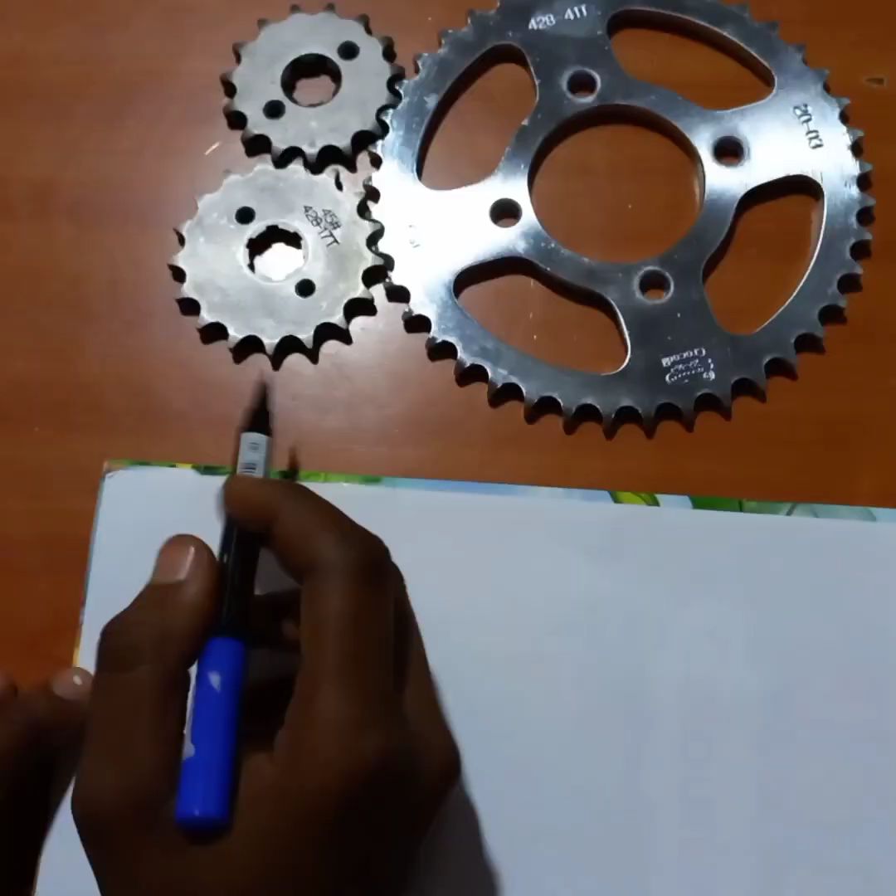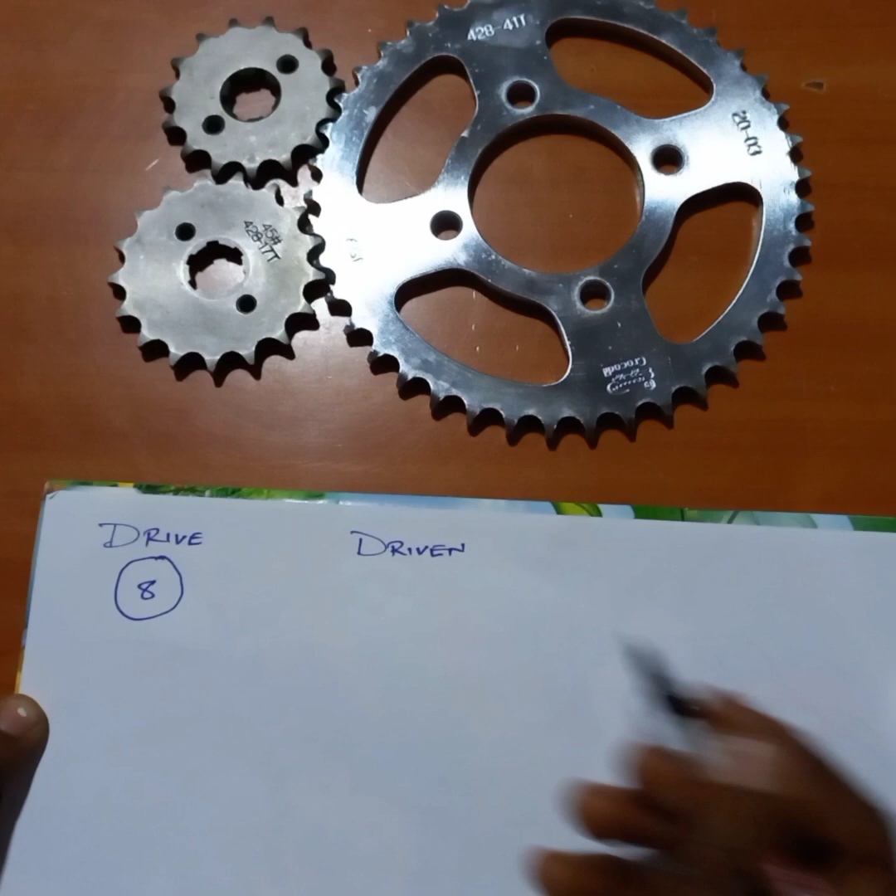In every motorcycle, you have a drive sprocket and a driven sprocket. For example, if you have a drive sprocket with 8 teeth and a driven sprocket with 16 teeth, to get the ratio: drive sprocket divided by driven sprocket. In this case, 8 divided by 16 equals 0.5.

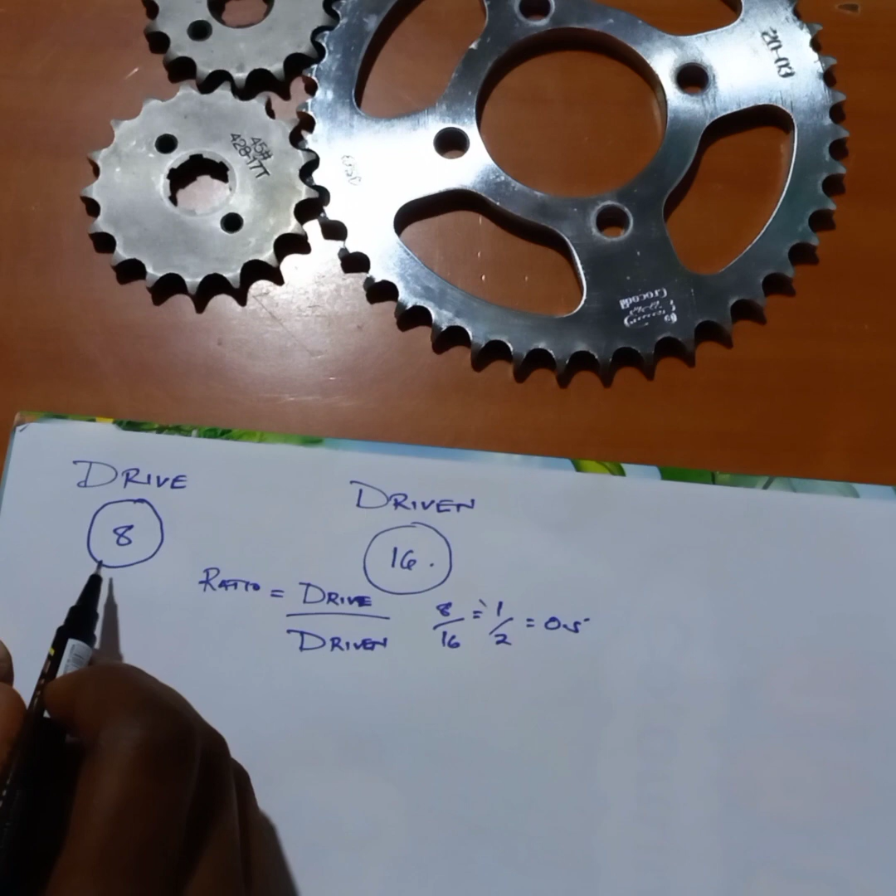This means that the driven sprocket is half as fast as the drive sprocket, and it also means that the drive sprocket will rotate twice to make this driven sprocket rotate once.

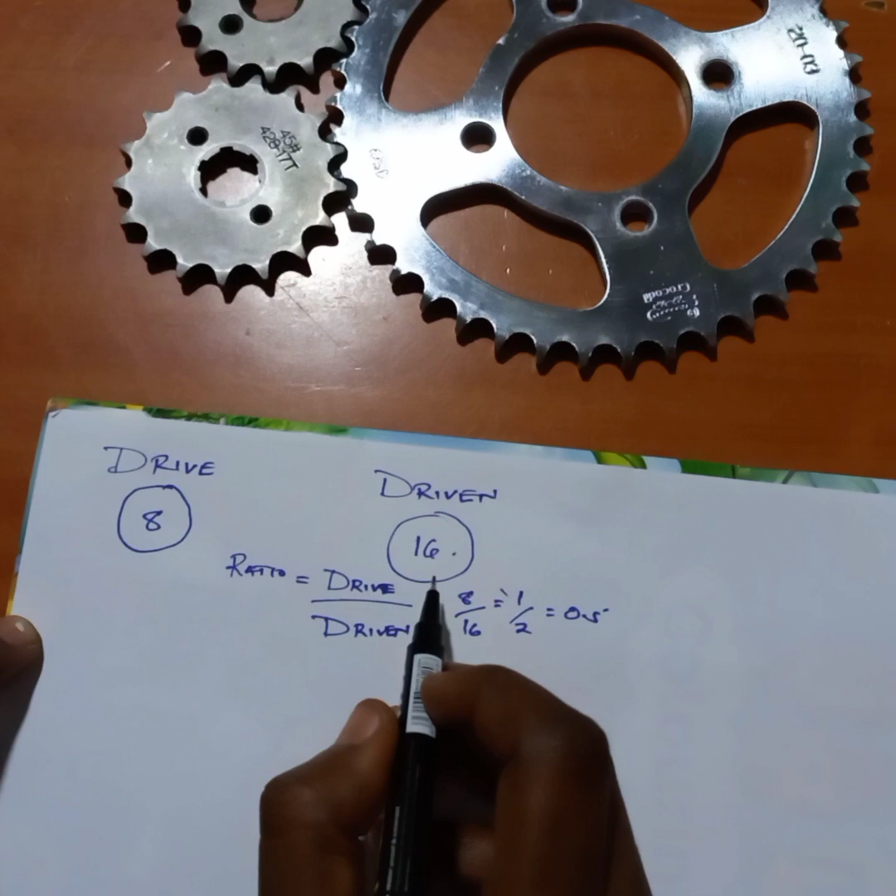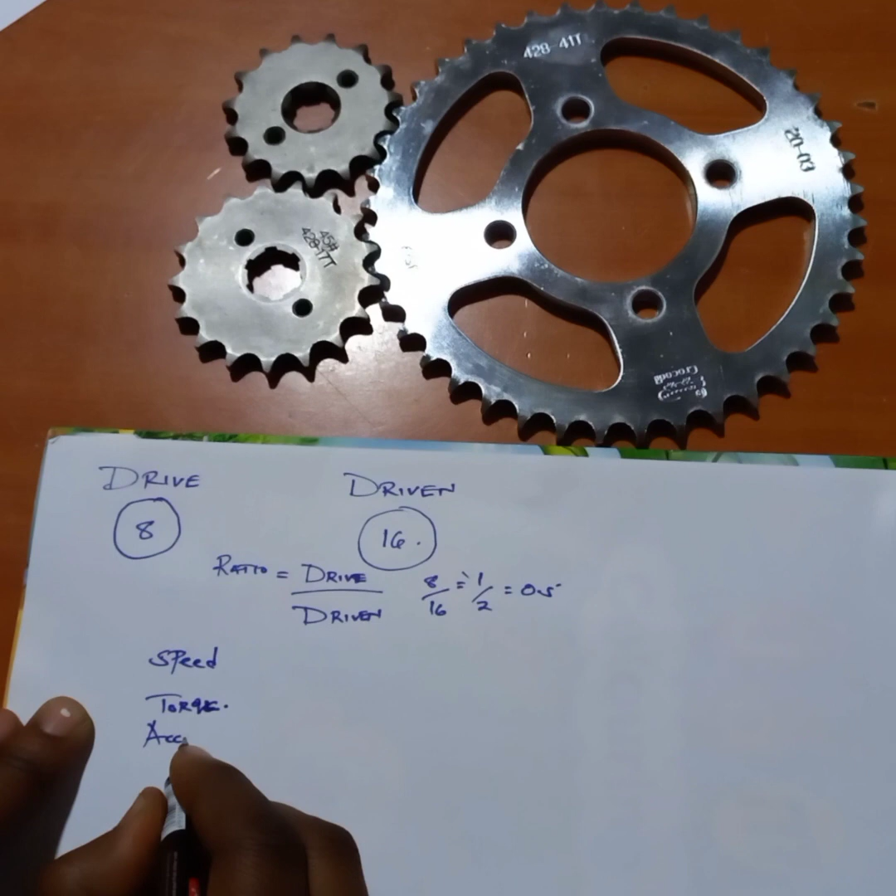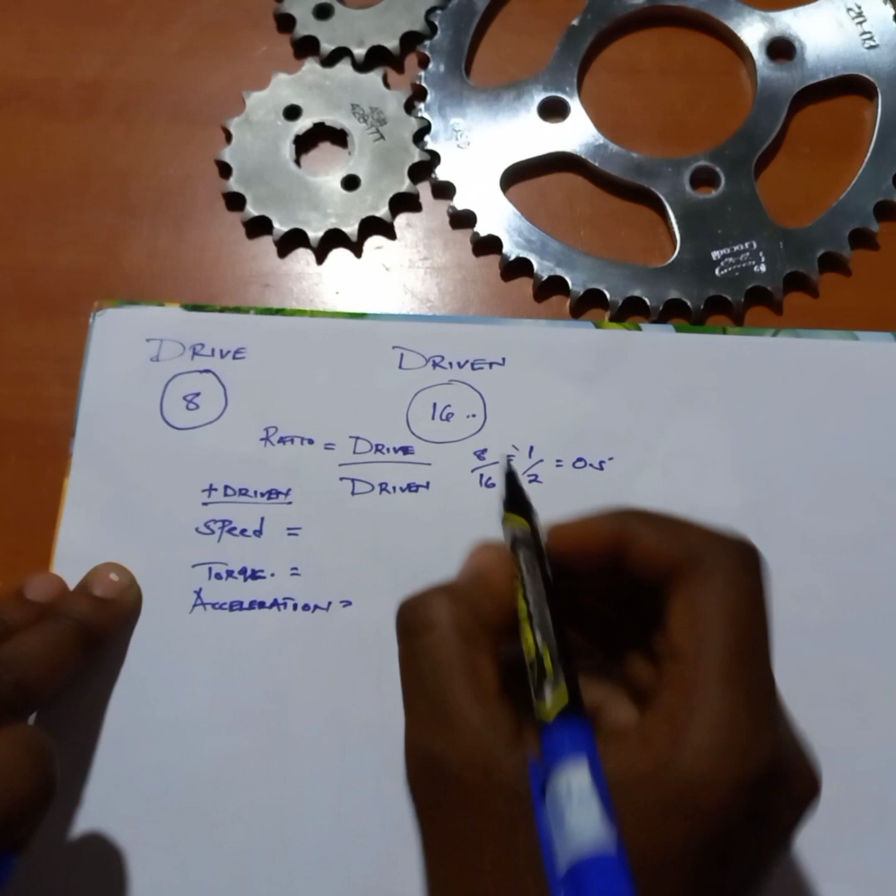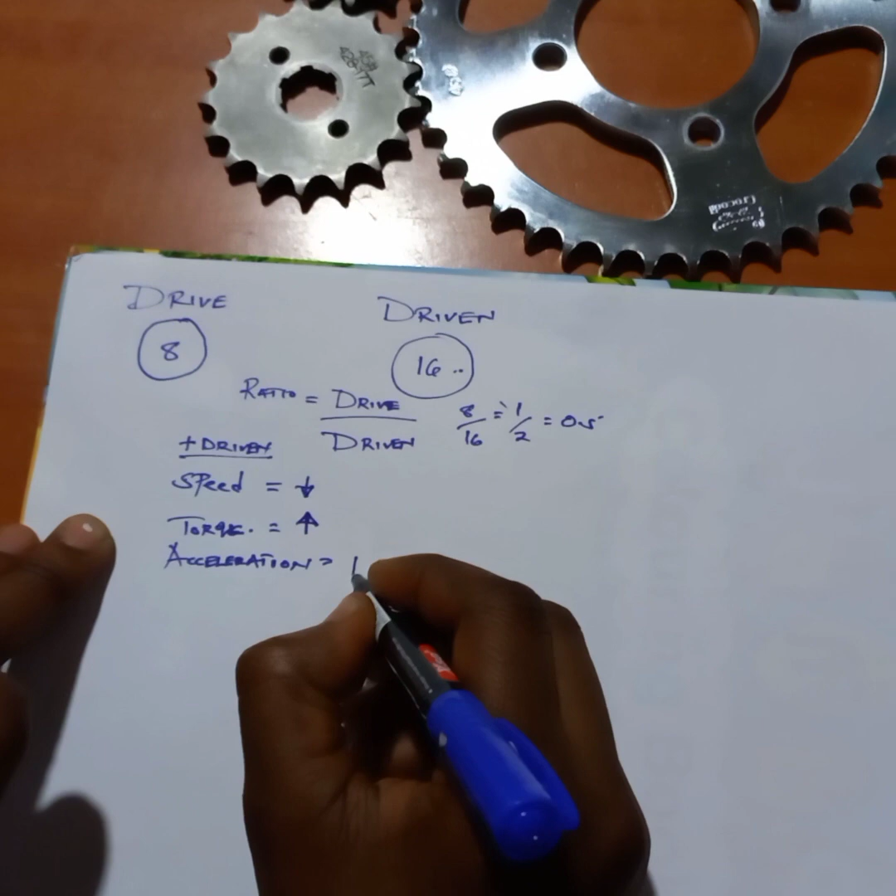So when you alter the number of teeth on either of these, the speed, torque, and acceleration changes. Every time you add teeth on the driven sprocket, the speed will reduce, the torque will increase, and the acceleration will increase.

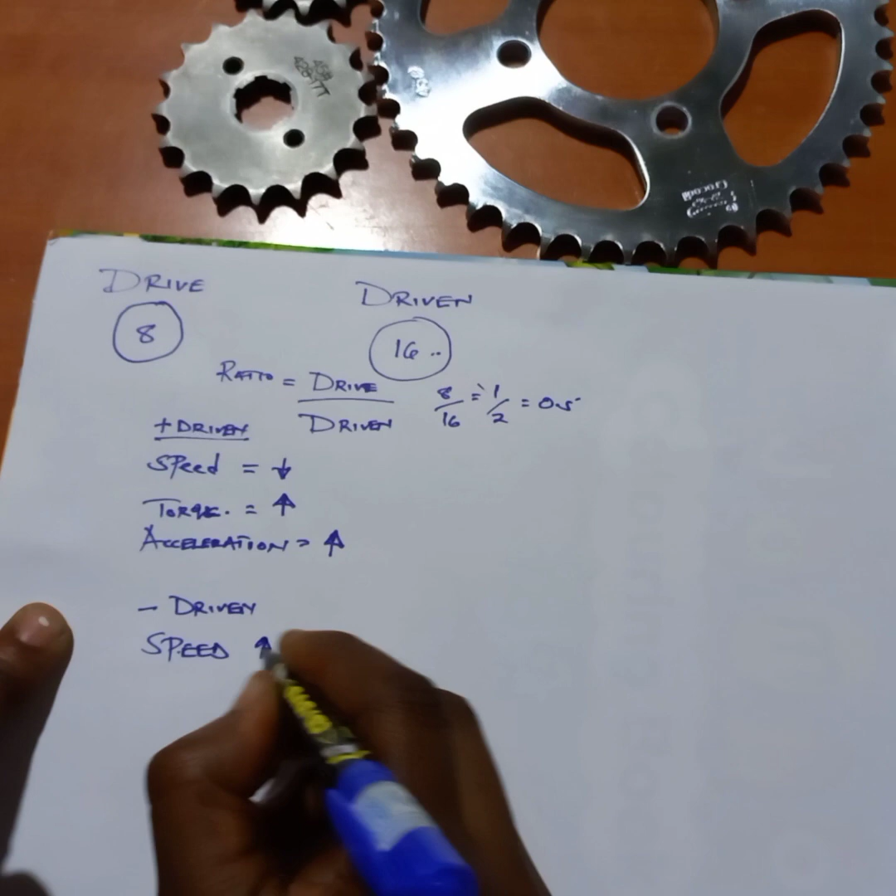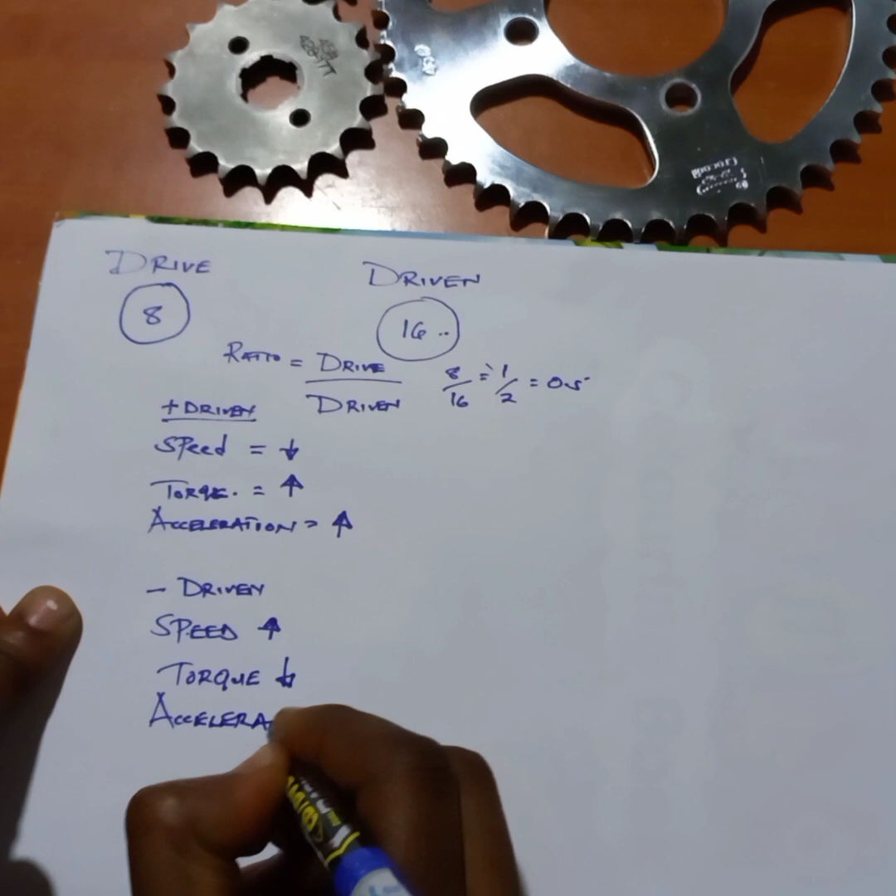When you reduce the teeth on the driven sprocket, speed increases, torque decreases, and acceleration decreases. Now you must be aware of the consequences.

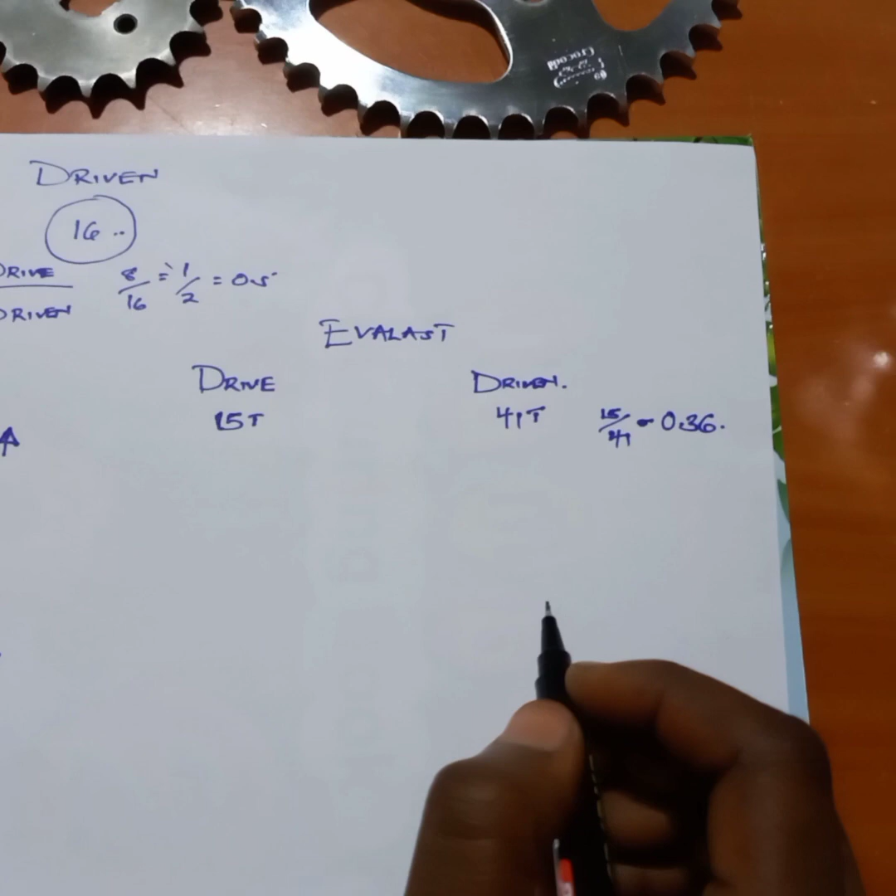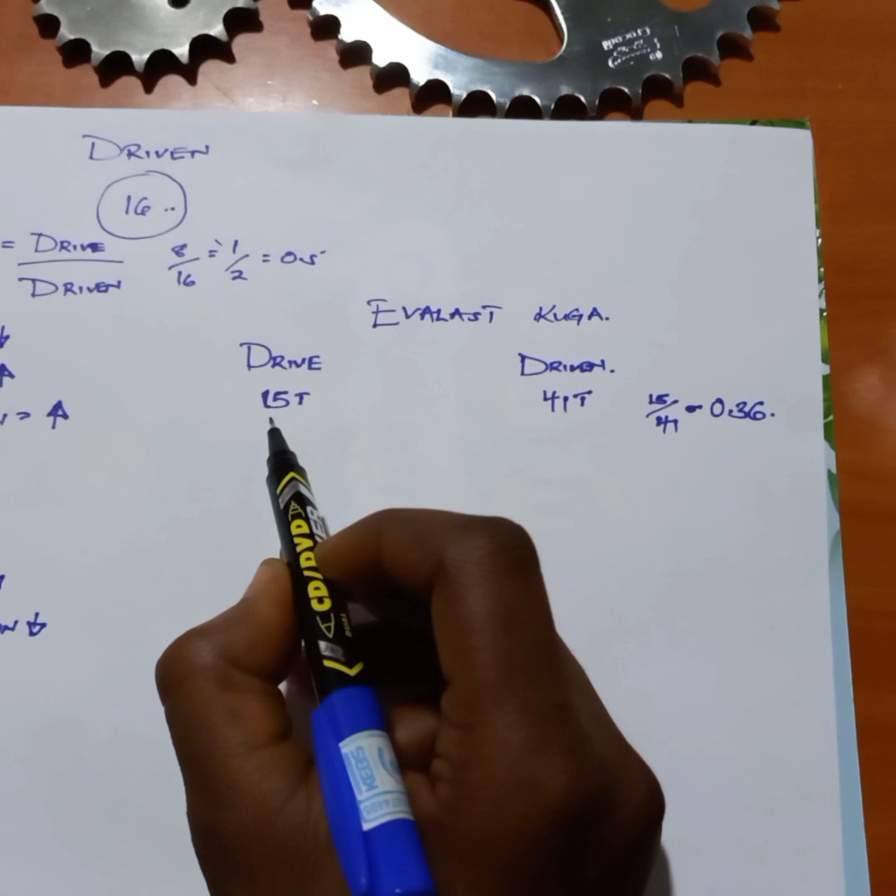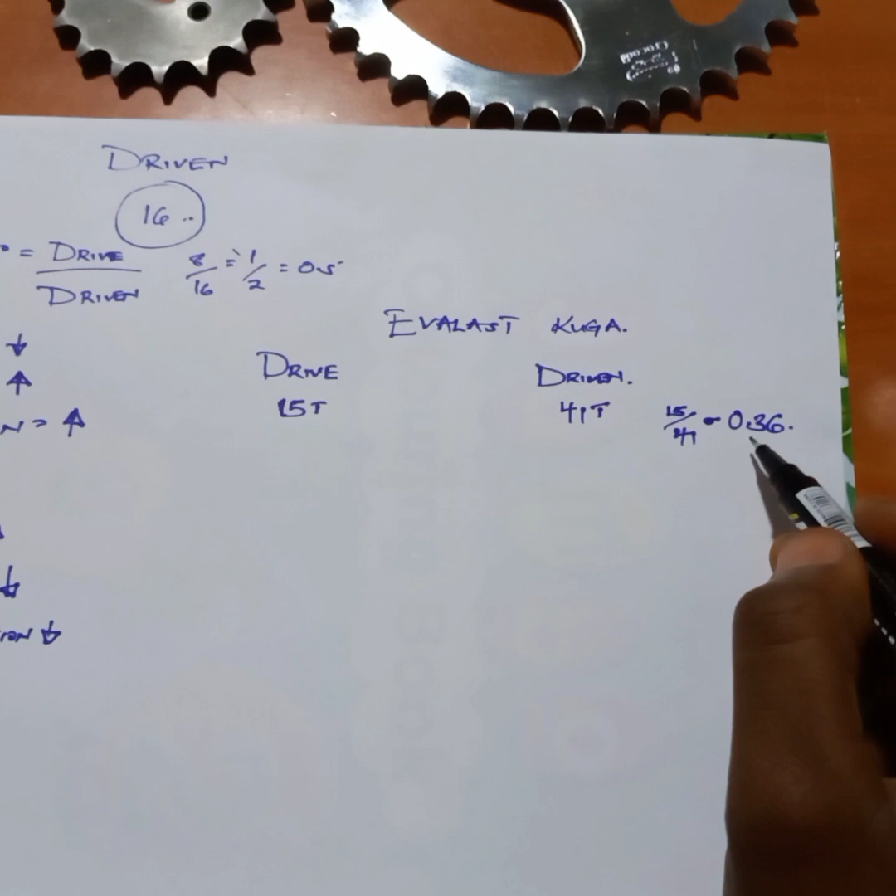So whenever we sell you an Evalast Kuga, the drive set consists of a drive sprocket having 15 teeth and a driven sprocket consisting of 41 teeth. Now to get the ratio, you divide 15 by 41, you get 0.365, or rather 0.37.

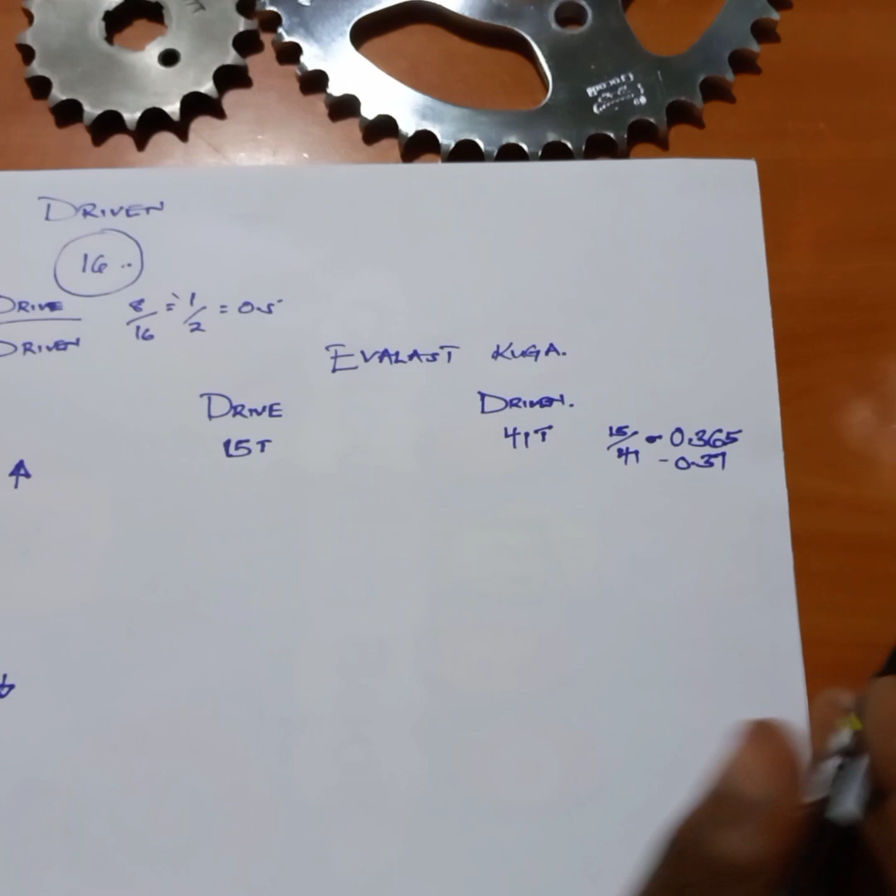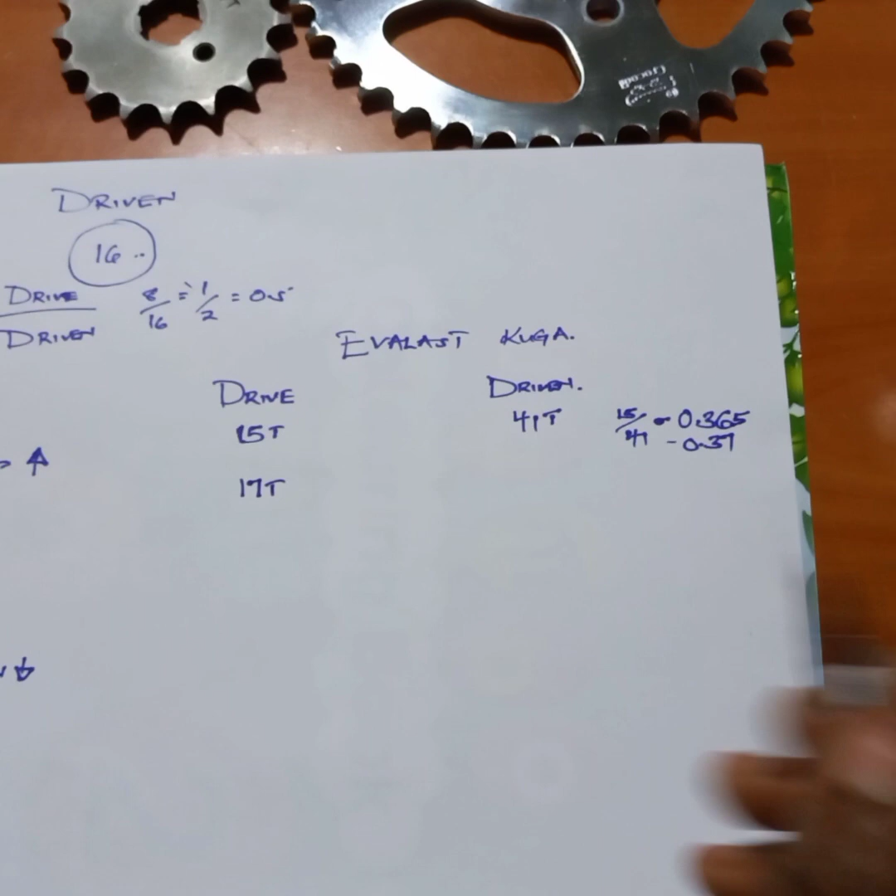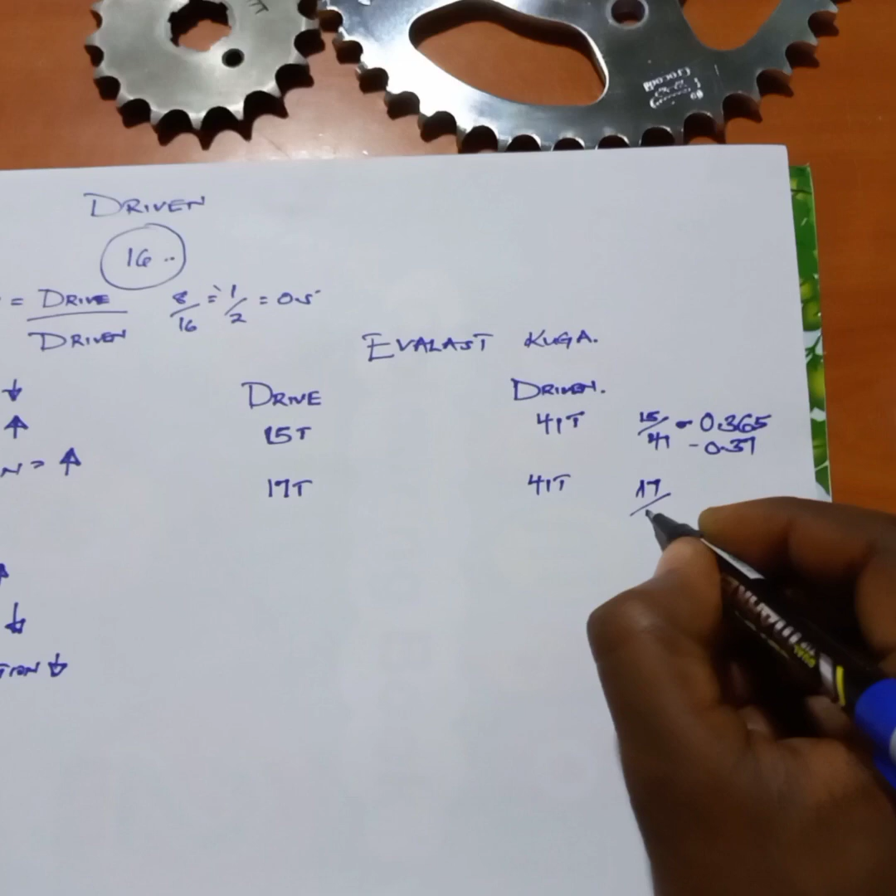Now at our shop, we usually have this drive sprocket consisting of 17 teeth, but we advise that you won't change the driven one, which will consist of 41 teeth. When you divide 17 by 41, you get a drive ratio of...

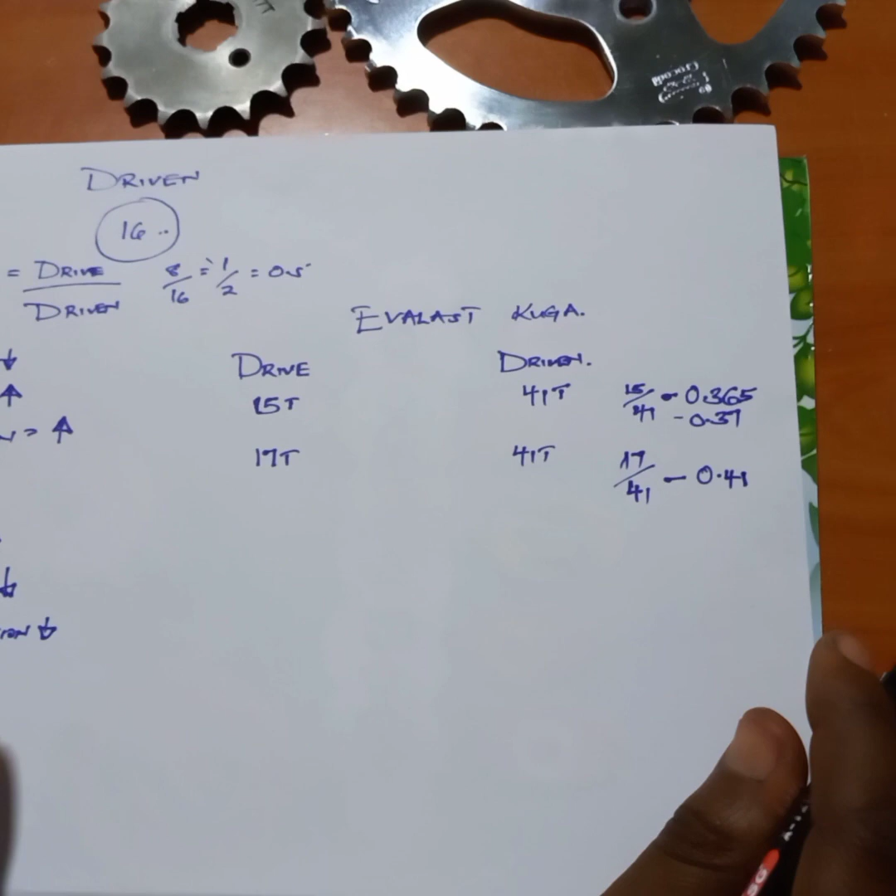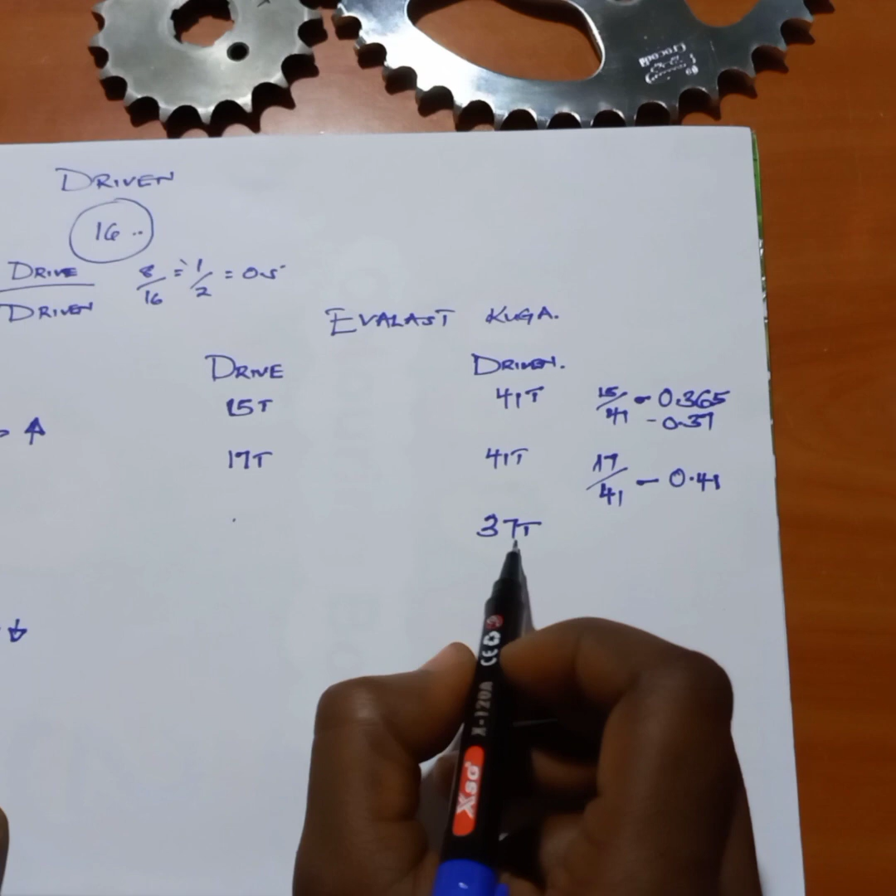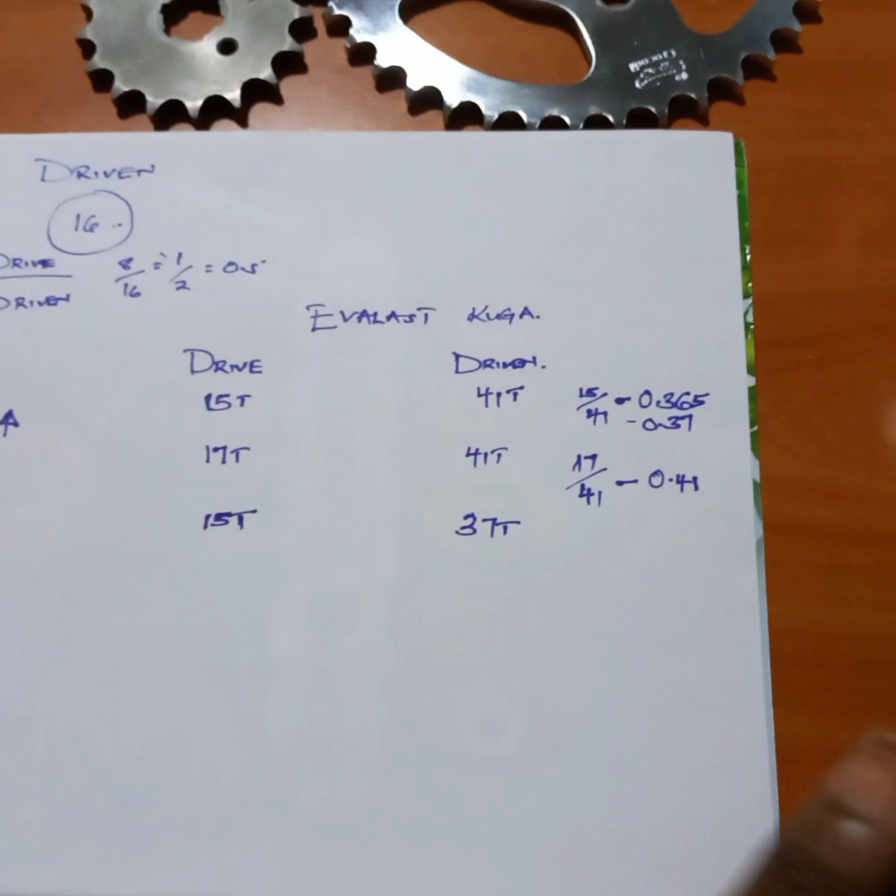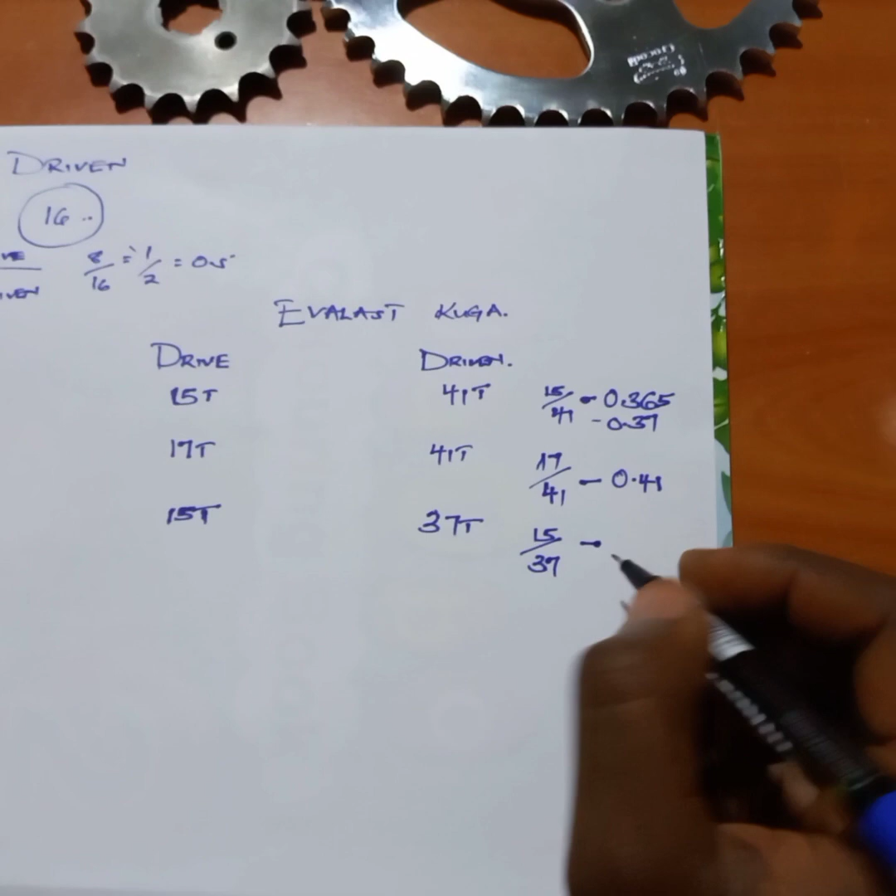0.41. Now we also have this driven sprocket that consists of 37 teeth. When you change this sprocket to 37 teeth, we advise that you keep the stock drive sprocket consisting of 15 teeth, which will give you a drive ratio of 0.40.

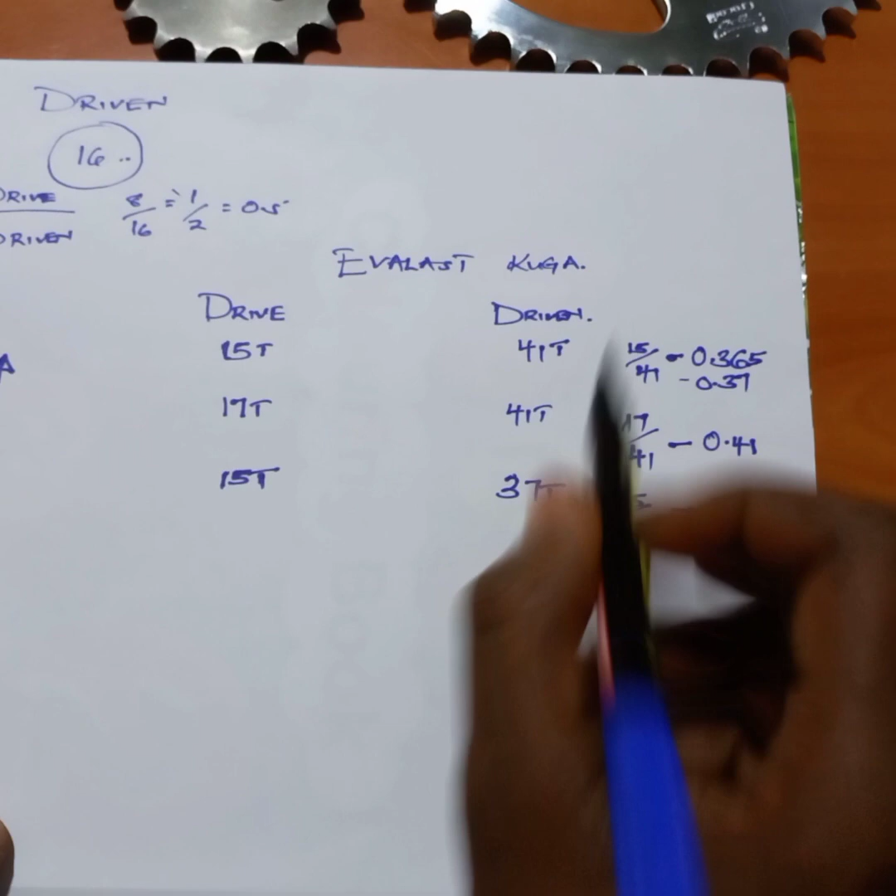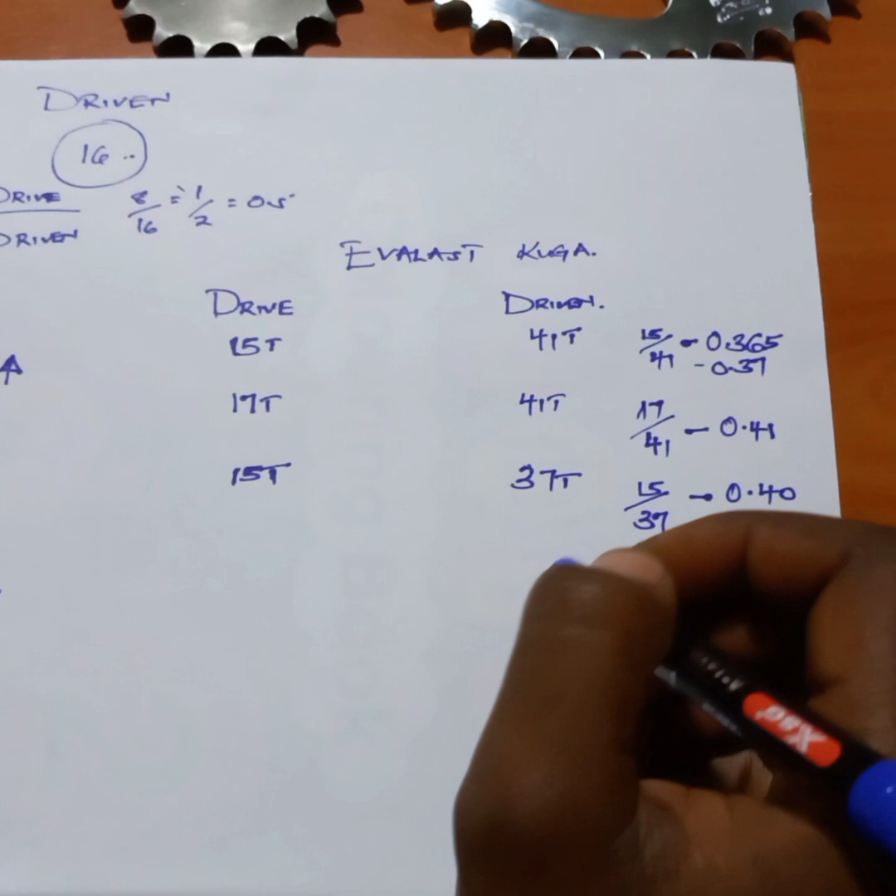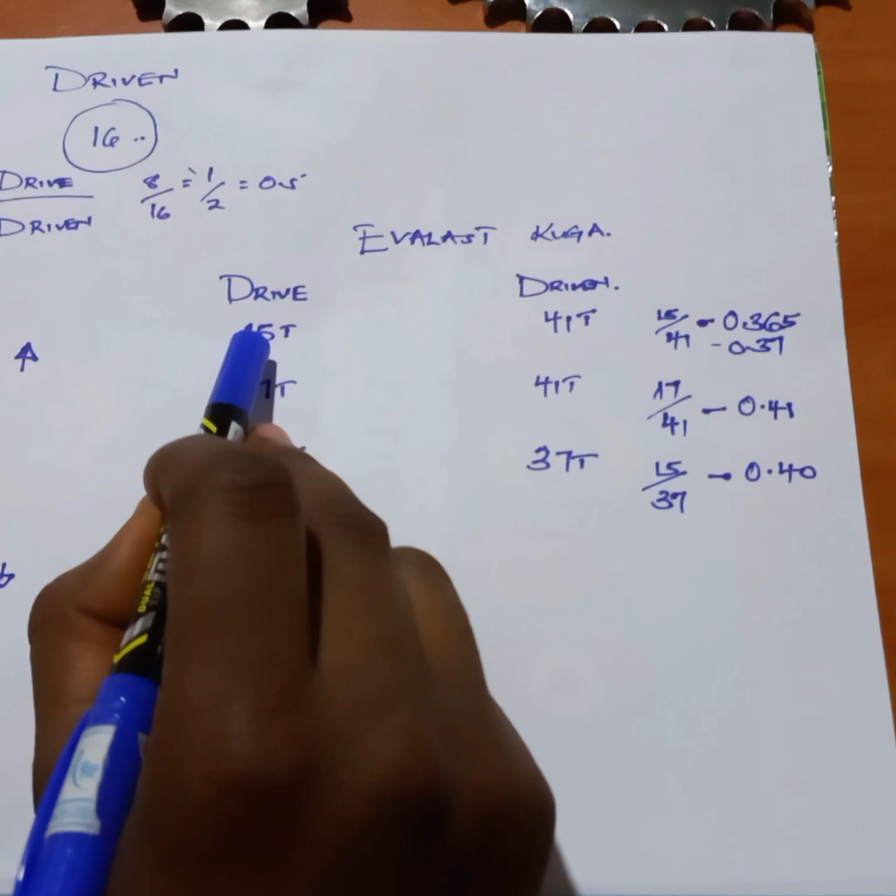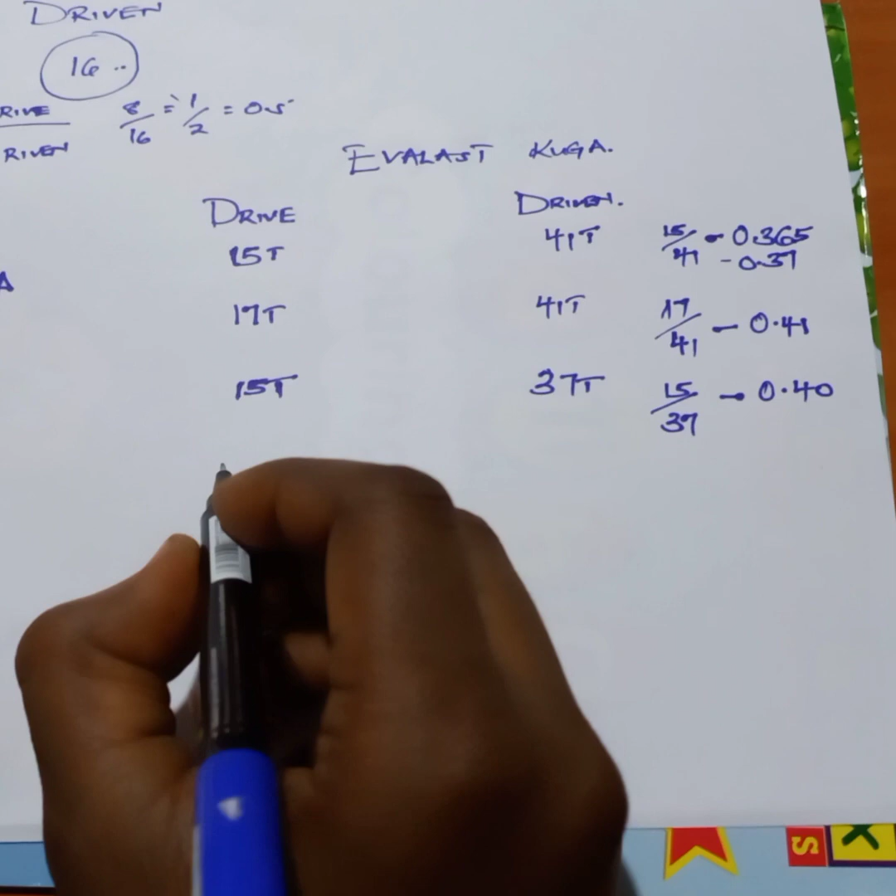Now by changing the sprocket, I'll show you how to calculate the percentage increase of speed, because by changing the sprockets we are trying to change the speed either to get more torque or more speed. In this case, every drive ratio here, apart from the stock, is giving you a more speed increase.

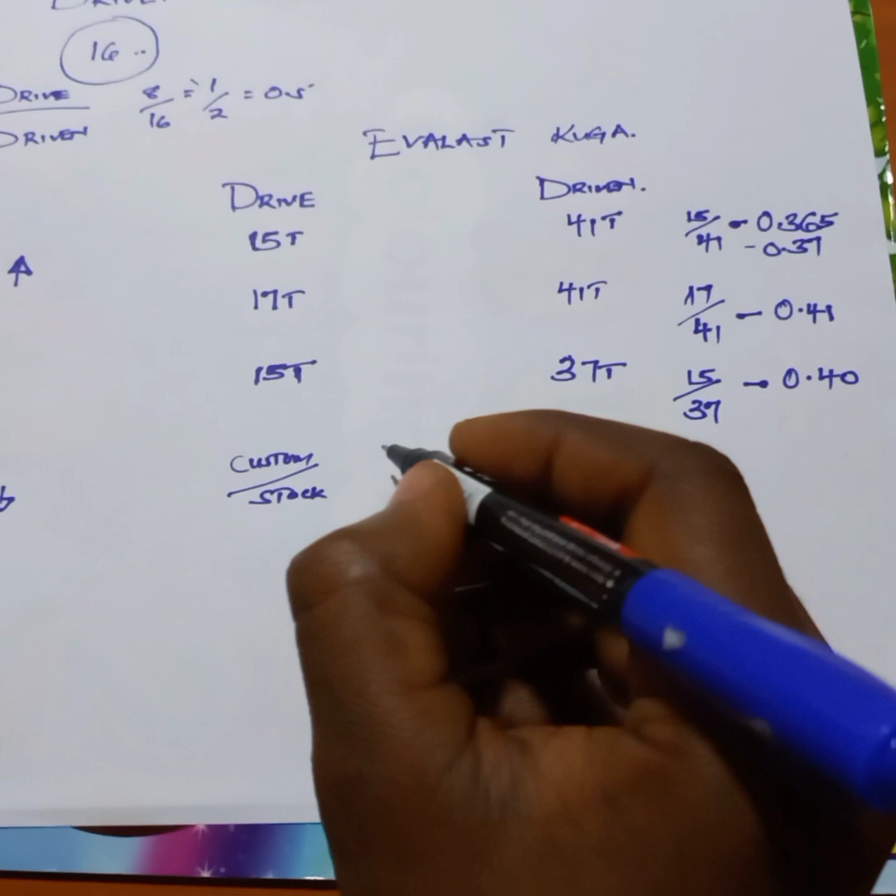So here's the formula of calculating the percentage increase: you take your custom ratio, divide by stock, then minus 1 and multiply by 100 to get the percentage increase of speed.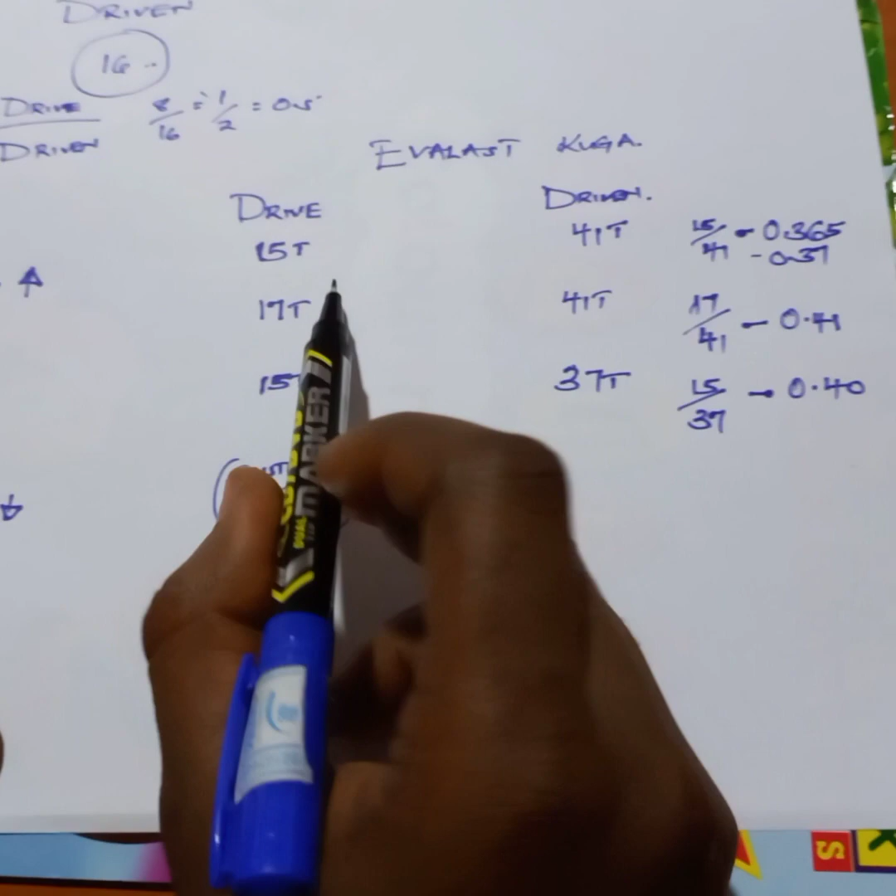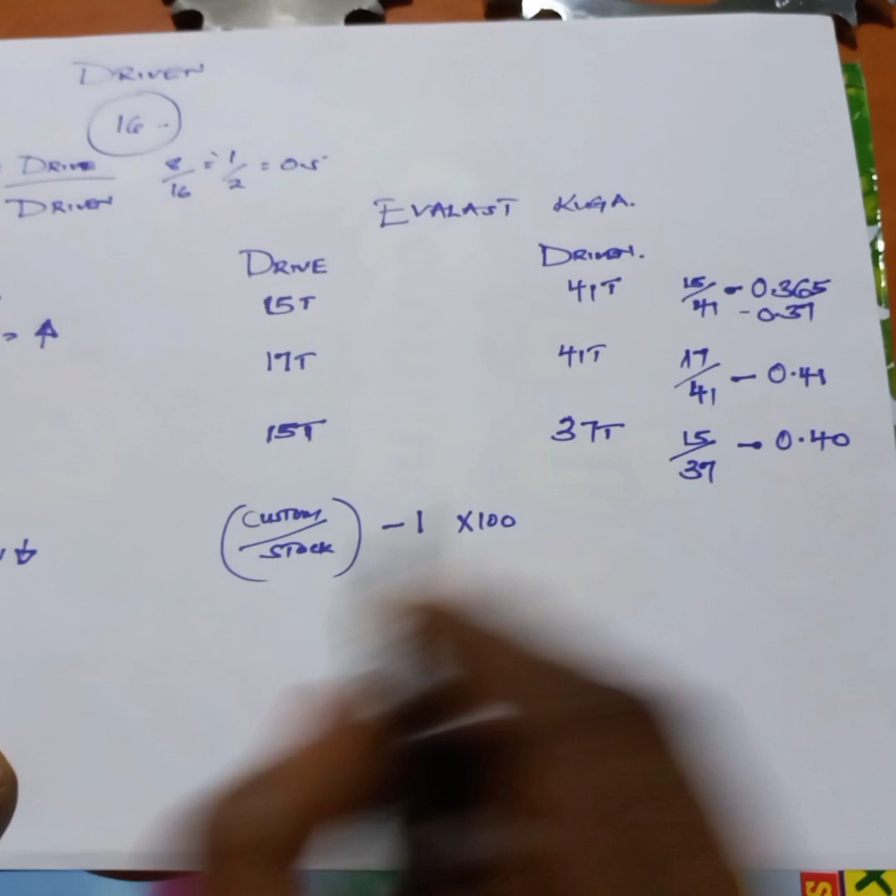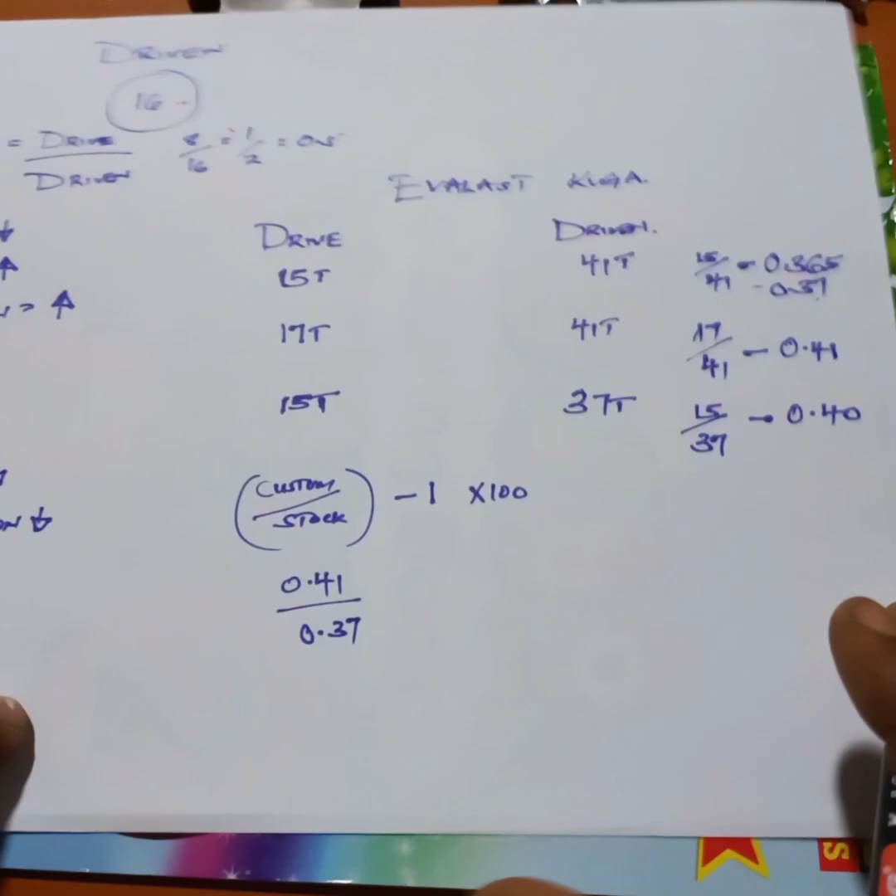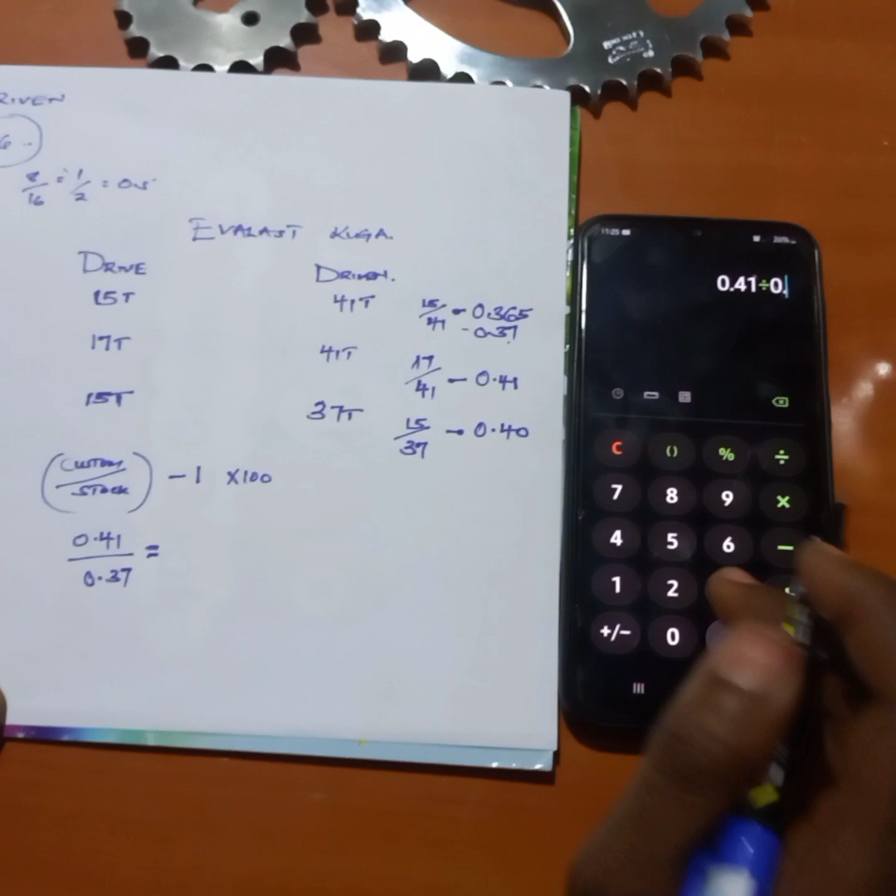So in this case, if you change your drive sprocket to 17 teeth and the rear one remains 41 teeth, your drive ratio is 0.41 when you change these sprockets to the speed-boosting ones. You divide by stock 0.37, you get 1.108.

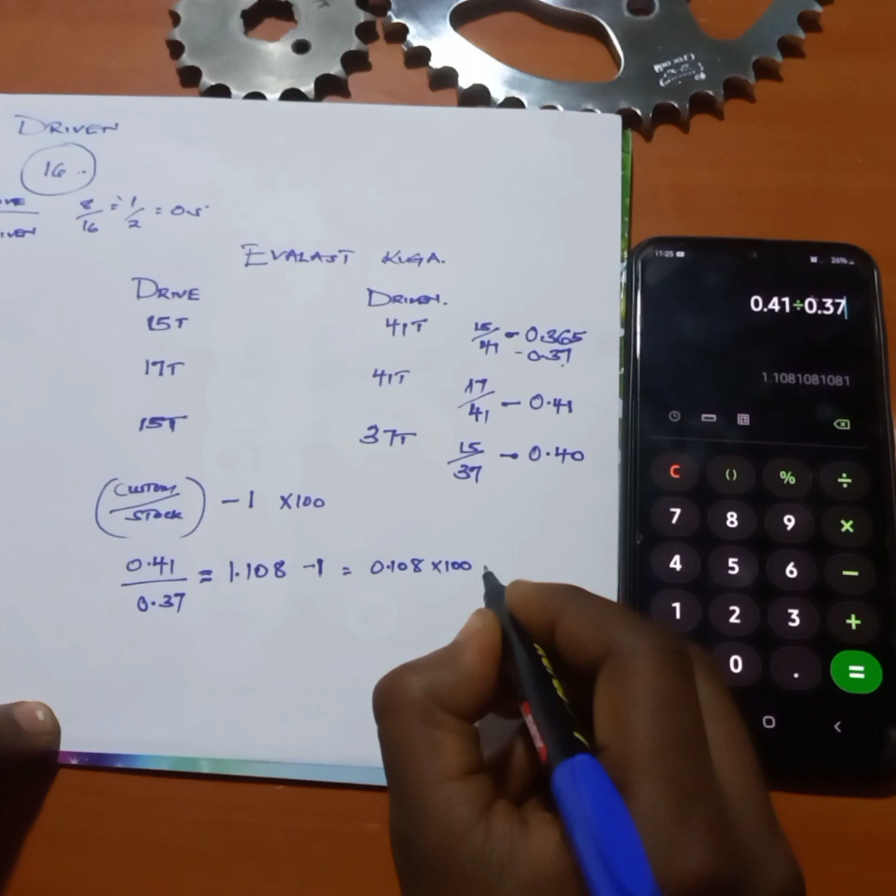Now when you minus 1, you get 0.108. When you multiply by 100, you get 10.8%. This is the percentage increase in speed.

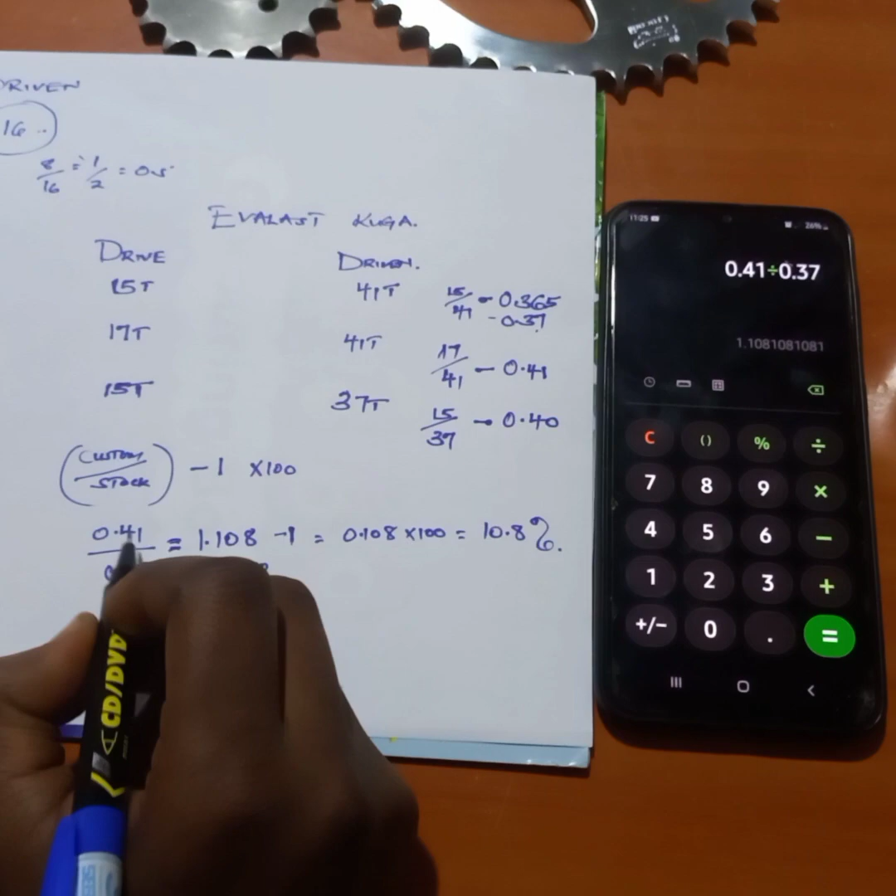This means that if your bike, a stock Evalast Kuga, does 110, when you put this configuration of drive sets, you multiply this 10.8, let's round off to 11%.

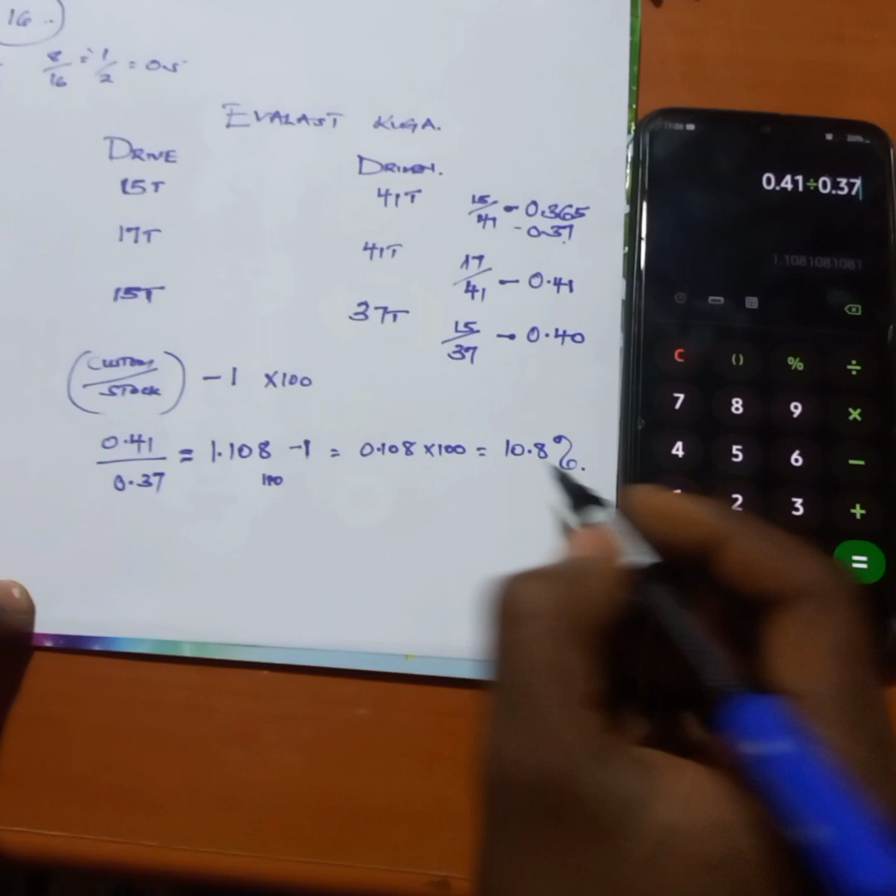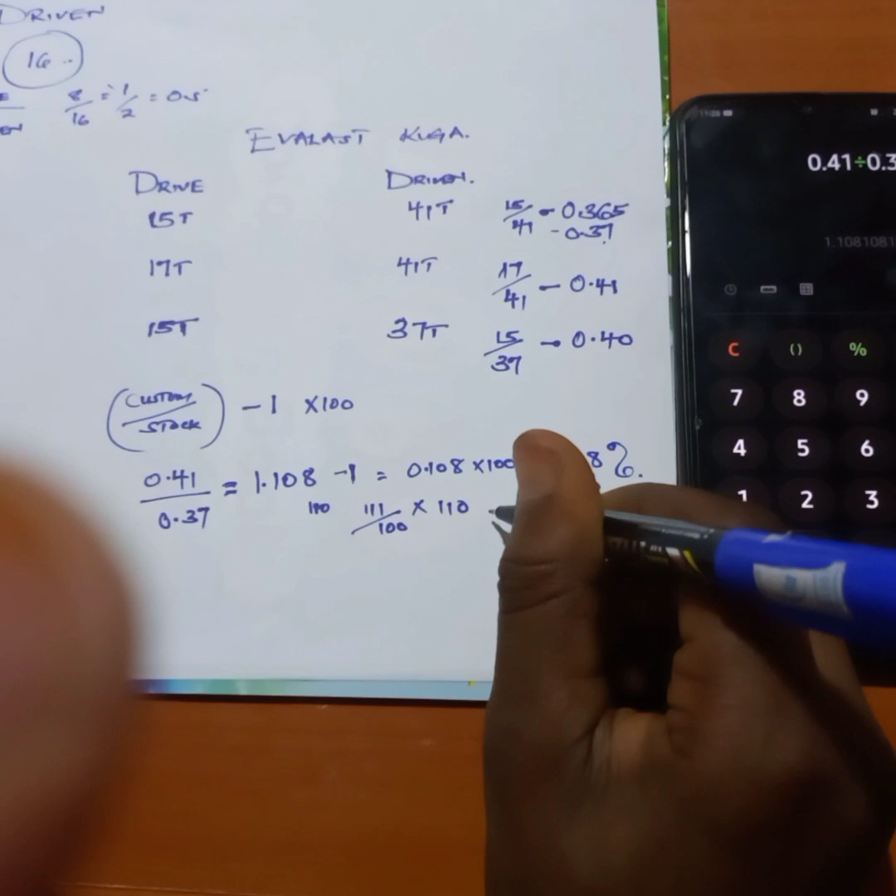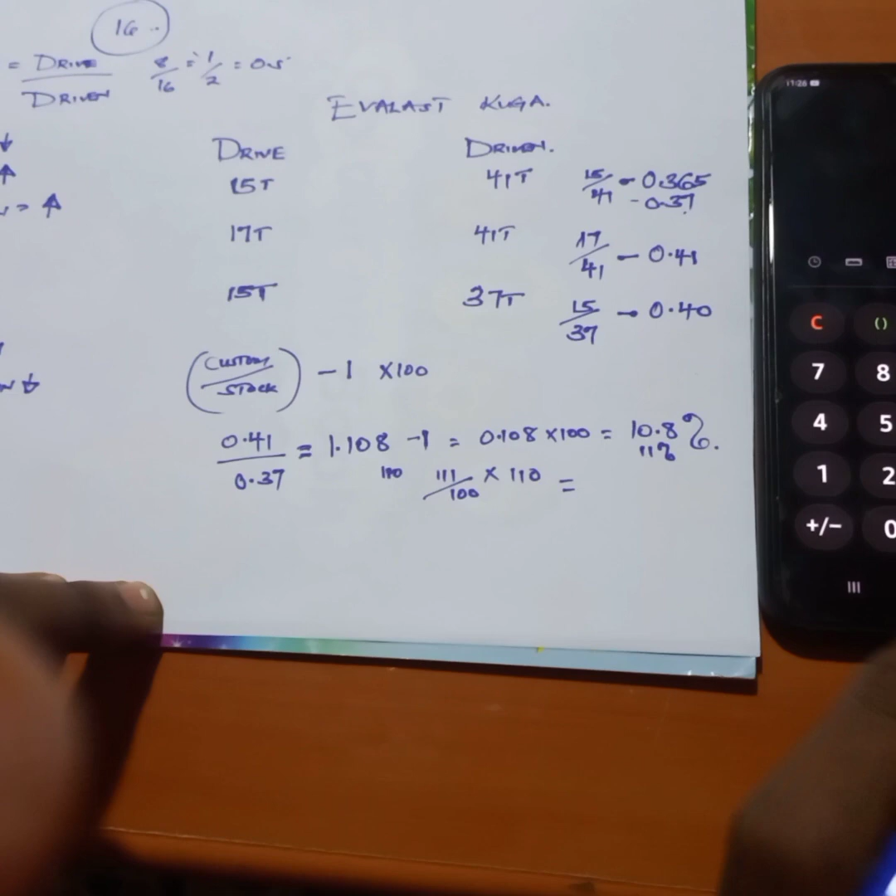Now you take 111 divided by 100, multiply by the speed. 111% multiplied by 110. Theoretically, your motorcycle will be able to do 122 kilometers per hour.

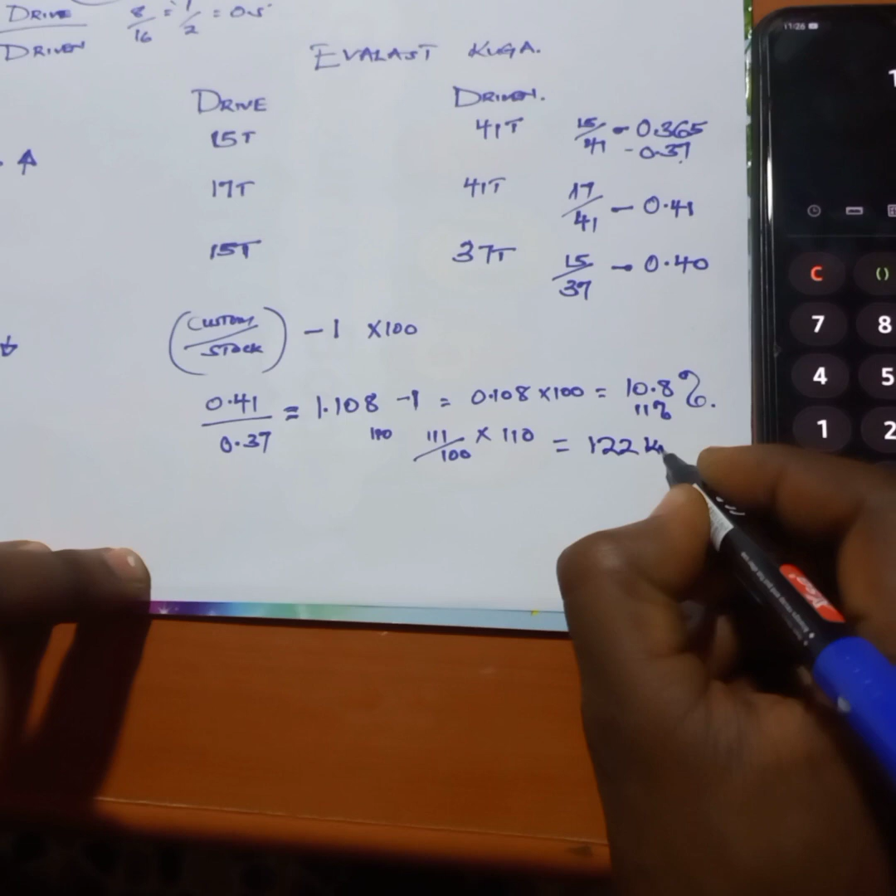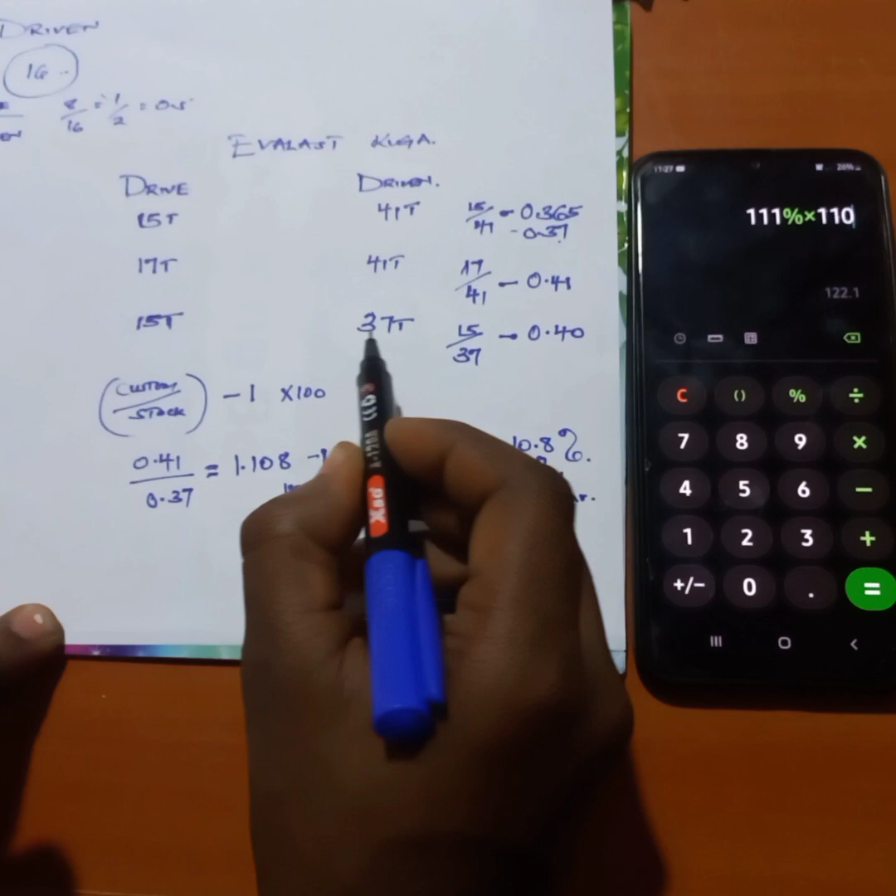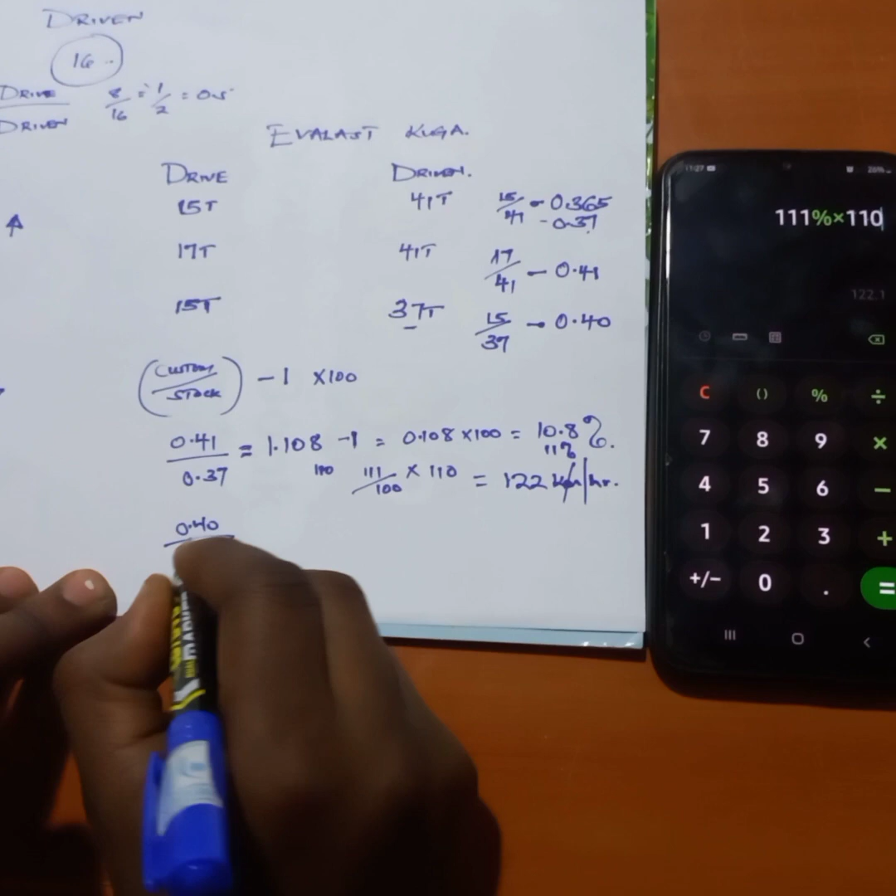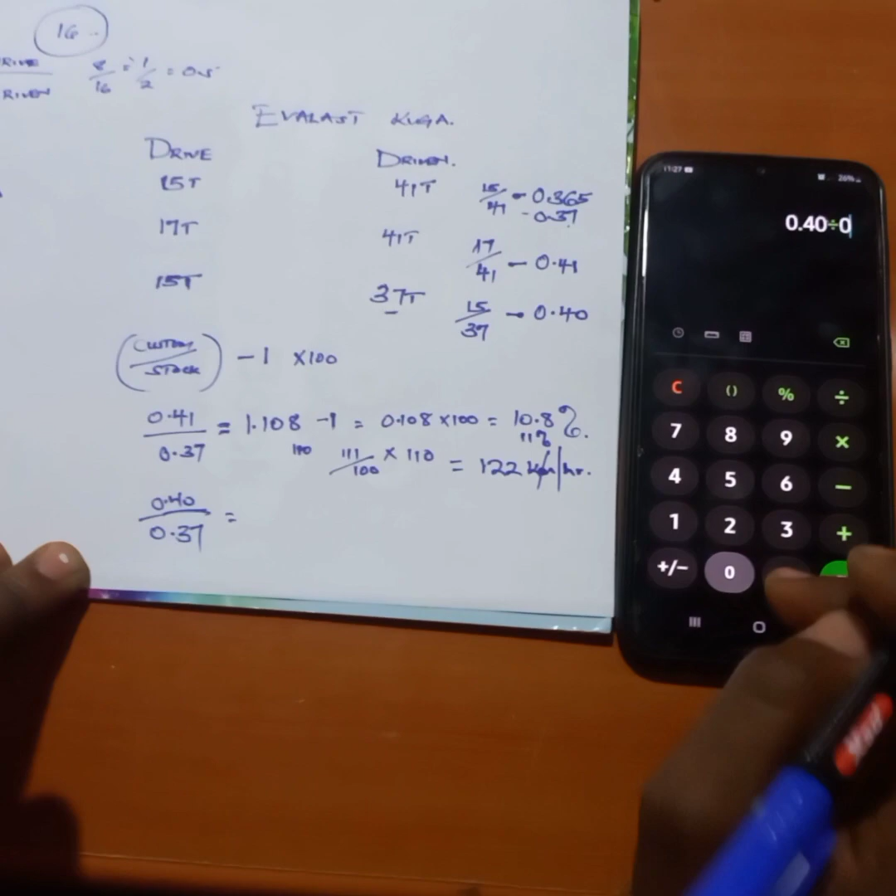Now when you change the driven sprocket to 37 teeth, let's calculate how much percentage increase of speed you will get. You divide 0.40 by the stock 0.37, you get 1.08. You deduct 1, you get 0.08.

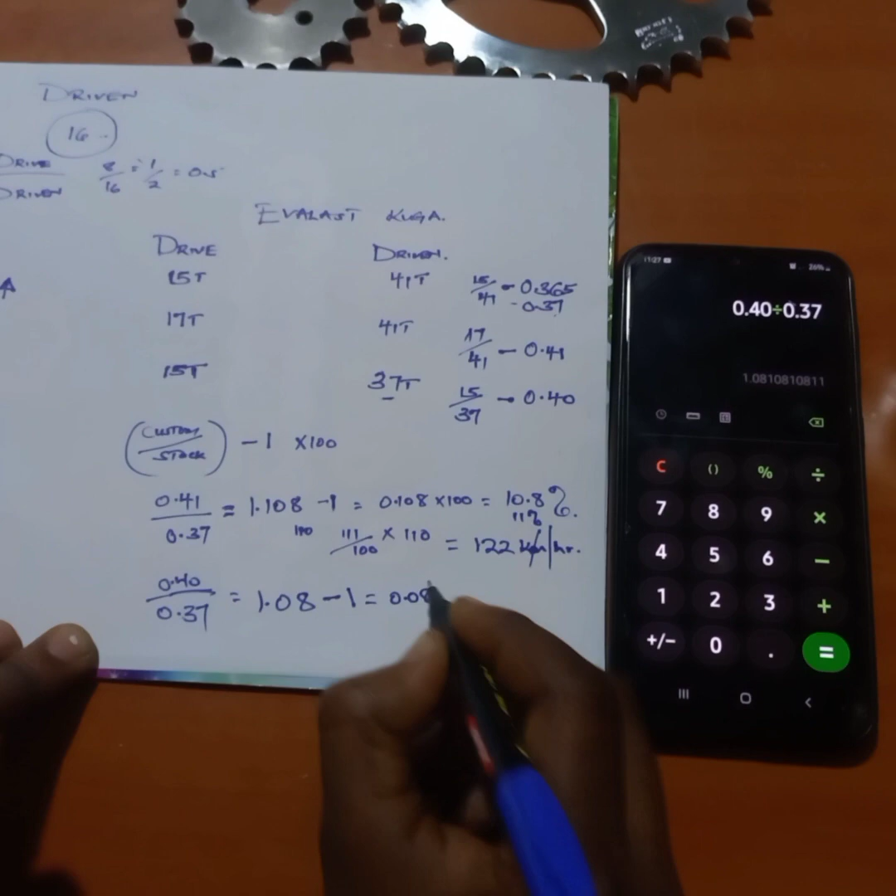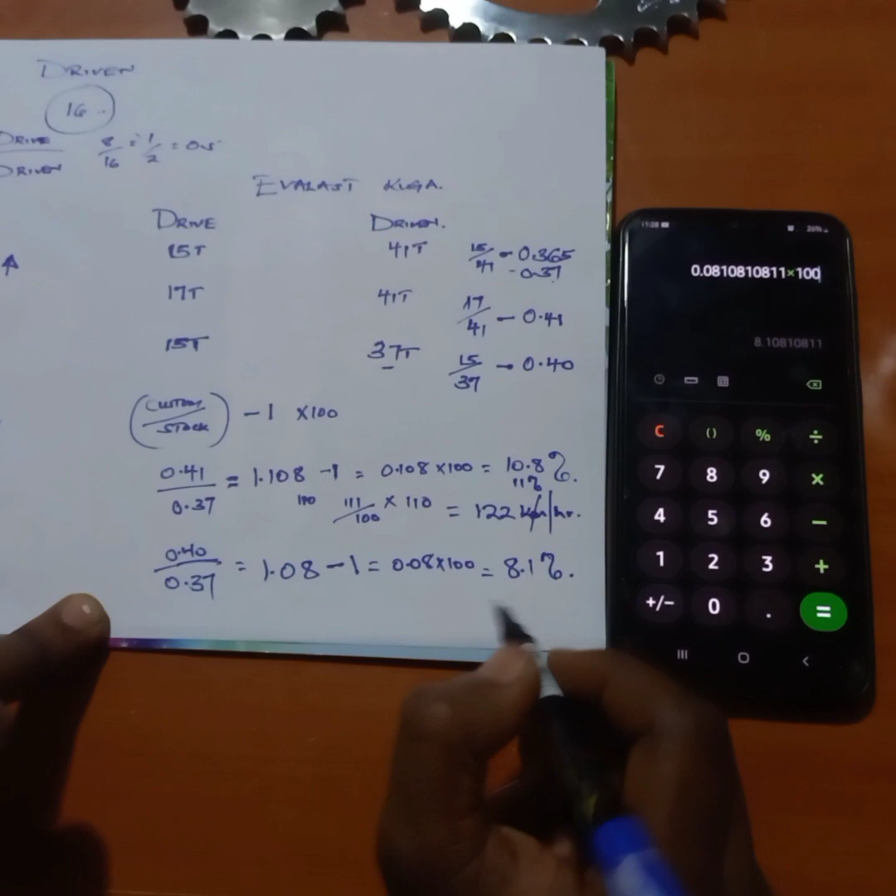When you multiply this by 100, you get 8.1%. Now your speed will increase by 8.1%.

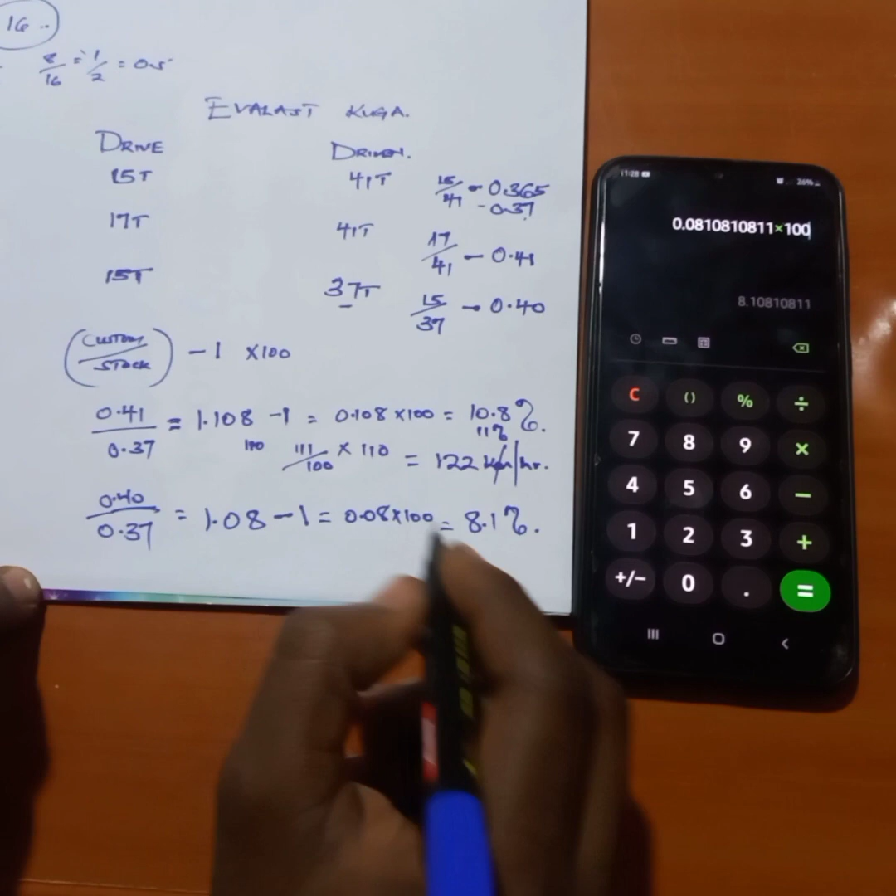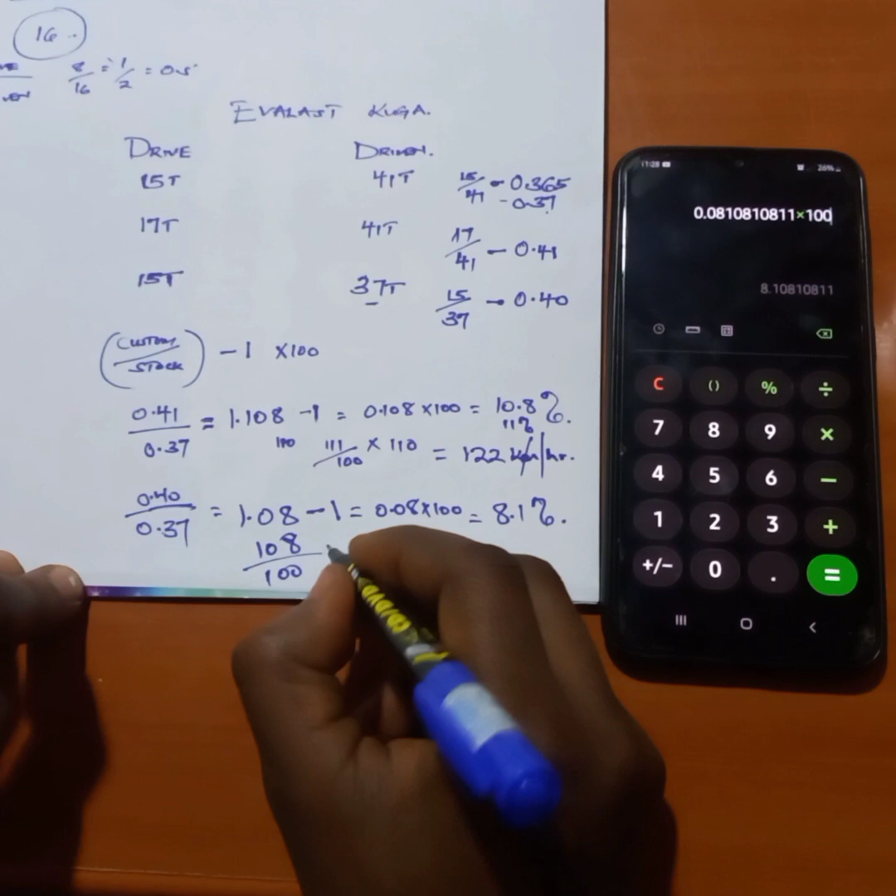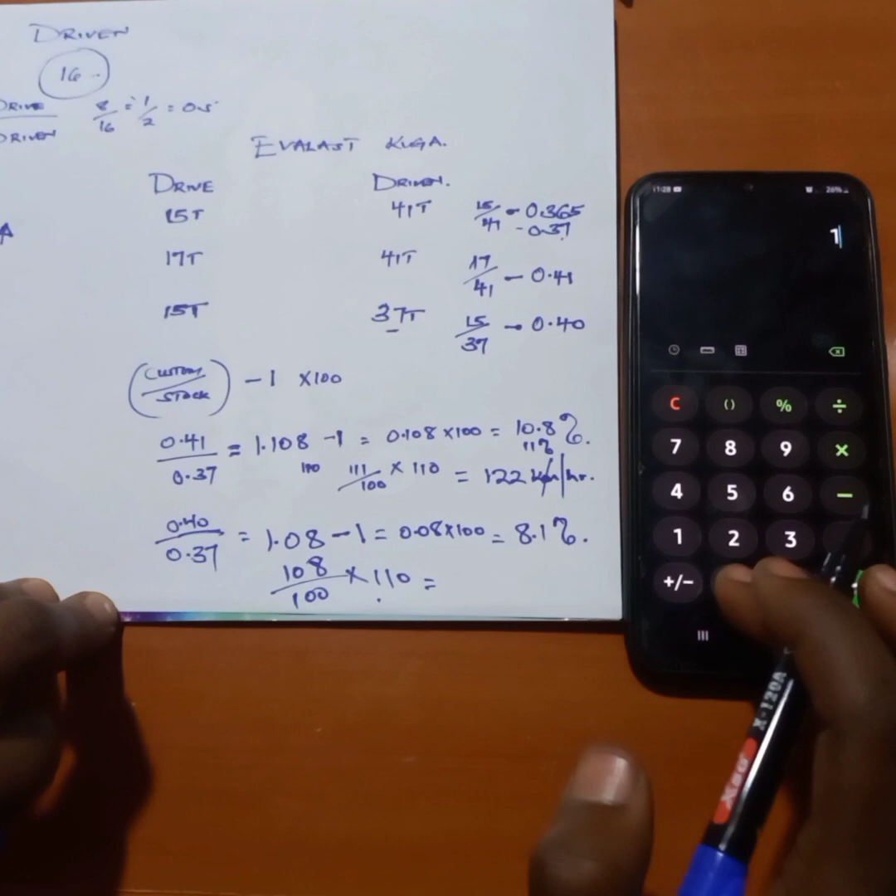Let's calculate how much speed your motorcycle will add. The stock Evalast Kuga does 110, meaning 108%, you divide by 100, multiply by 110. You punch this on your calculator, and your motorcycle will be able to do 118.8.

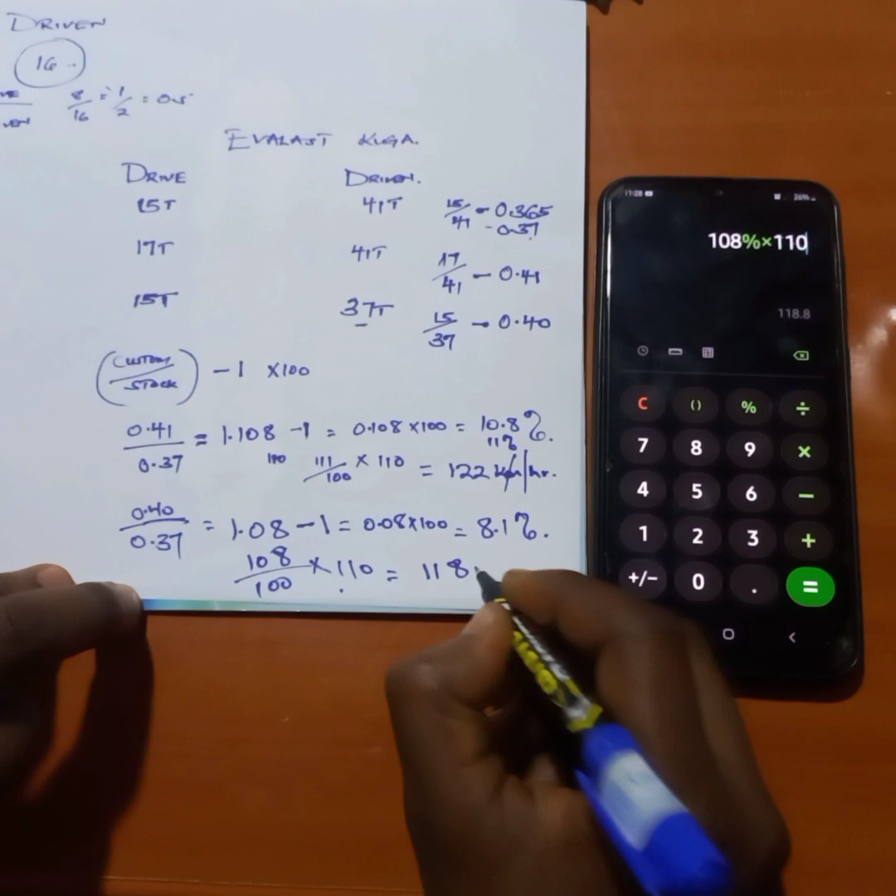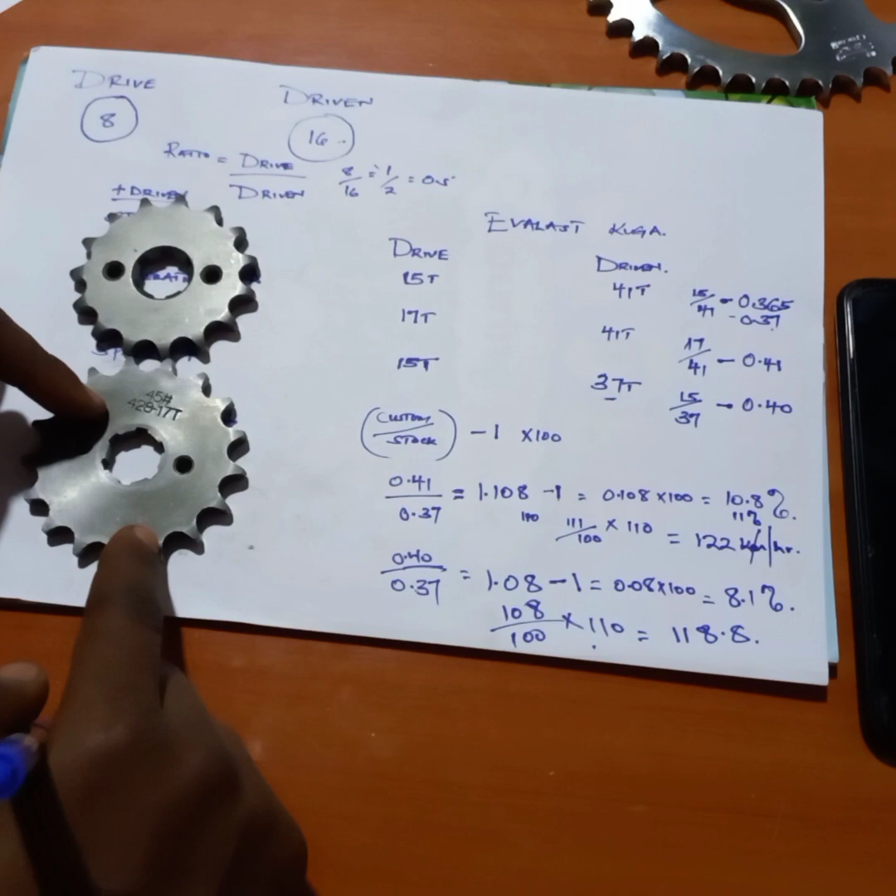So finally, we can conclude that changing your drive sprocket from 15 teeth to 17 teeth will be more effective than changing your driven sprocket from 41 teeth to 37 teeth.